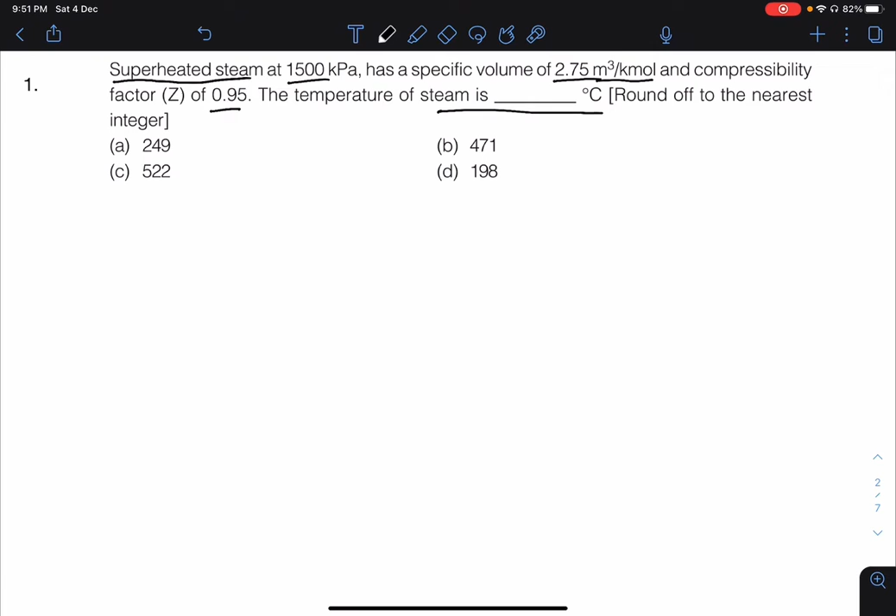Superheated steam at 1500 kilopascal has a specific volume of 2.75 meter cube per kilomole and compressibility factor Z of 0.95. The temperature of the steam is asked. So here I have underlined superheated steam and the value of Z is 0.95. If Z is equal to 1, we know it will behave as an ideal gas.

Since our Z is very close to 1, we can consider superheated steam as an ideal gas and use PV equals ZRT. Here we should know what R to use. Since it is given in kilomole, we will use the value of R as 8.314, that is in kilojoule per kilomole Kelvin. Since pressure is 1500 kilopascal

into 2.75 is equal to 0.95 into R which is 8.314 into T. So here we will get the temperature in Kelvin, but the temperature they are asking for is in degrees Celsius. So we have to subtract 273 from this equation.

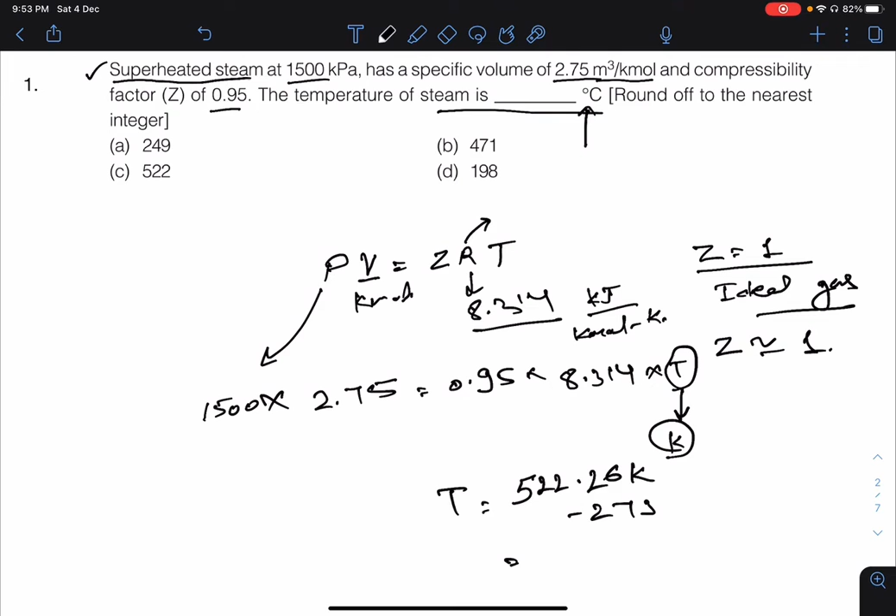So the temperature that will come out is 1500 into 2.75 divided by 0.95 divided by 8.314, that is 522.26 Kelvin. So we subtract 273 to convert it into degrees Celsius, that gives 249. So the correct answer is A.

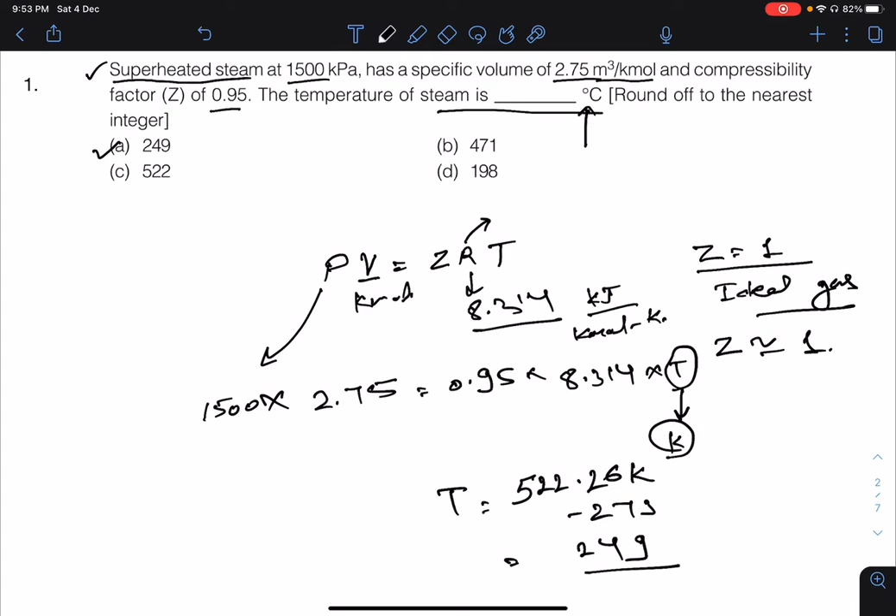We will move to the next question. In the vicinity of the triple point, the equation of the liquid vapor boundary in the PT phase diagram for ammonia is this one, where P is the pressure in Pascal and T is the temperature in Kelvin.

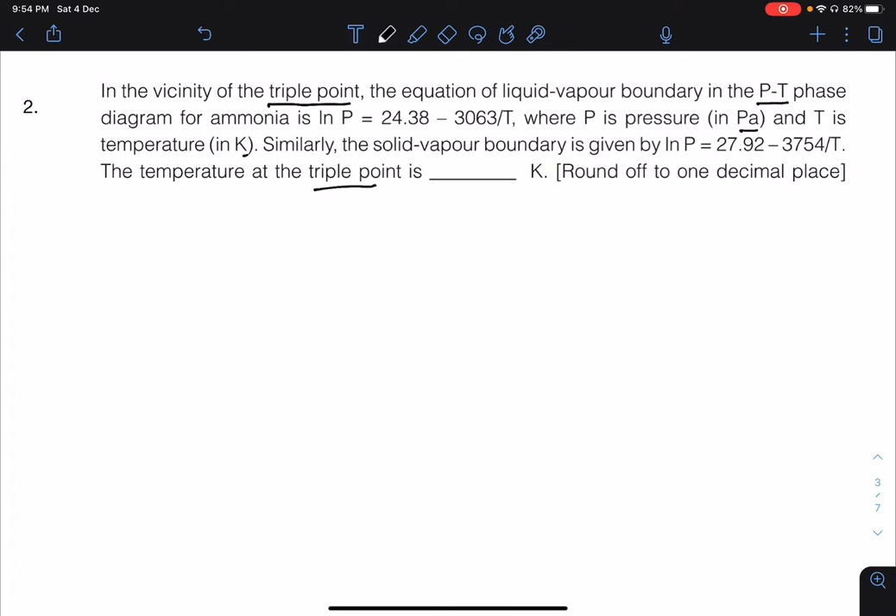Similarly, the solid boundary vapor boundary is given by this equation. The temperature at the triple point is asked. In GATE, you should read the units very carefully. This is in Pascal and this is in Kelvin, so we have been asked for Kelvin only.

So we know the diagram - this is our solid phase, this is our liquid phase, and this is our vapor phase. This point is called the triple point. What is the property of the triple point? That the solid, liquid and vapor phases all meet at this point. So at the temperature of the triple point, the pressure will be same.

So we can equate both equations, ln P from this equation and that equation. So we can write 24.38 minus 3063 divided by T is equal to 27.92 minus 3754 divided by T.

We will multiply the whole equation with T, and the result we get after solving this equation is T equals 195.197 Kelvin. Rounding off to one decimal place, we can write it as approximately 195 Kelvin.

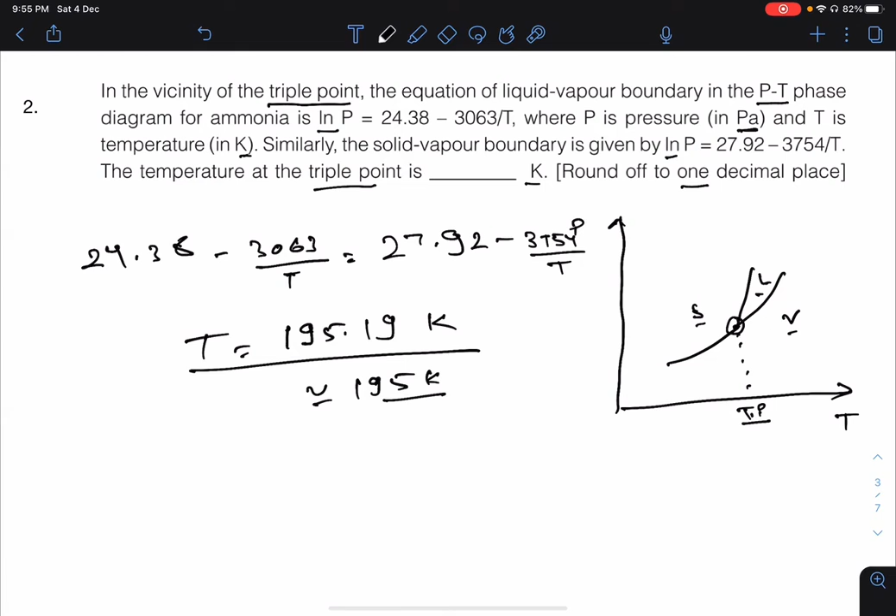This question is also very important, and if you have practiced previous year thermodynamics questions, then you can solve this question in 5 seconds only.

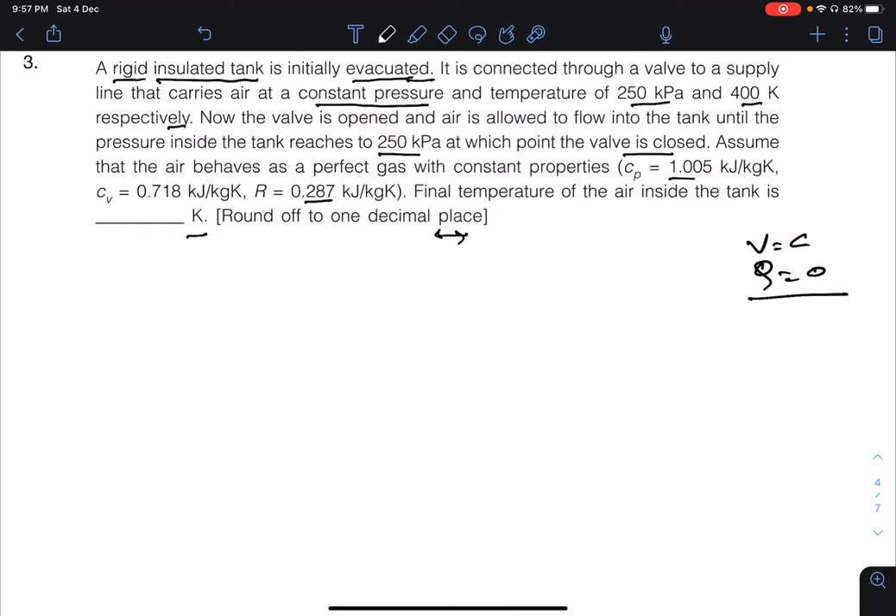So we have to solve this question. We will draw one tank, like this, which has a fixed volume and is connected to a valve with a supply line. In this, air is flowing at a pressure of 250 and temperature 400 kilopascal, 400 Kelvin. So there is only one inlet, there is no outlet at this point.

So this question is basically related to steady state, steady flow. Suppose at t equal to 0, this is the condition of the tank, and at time t equal to t, when the gas reaches a constant temperature, the final conditions in the tank are P equal to 250 kilopascal.

So here we have to write the steady flow energy equation.

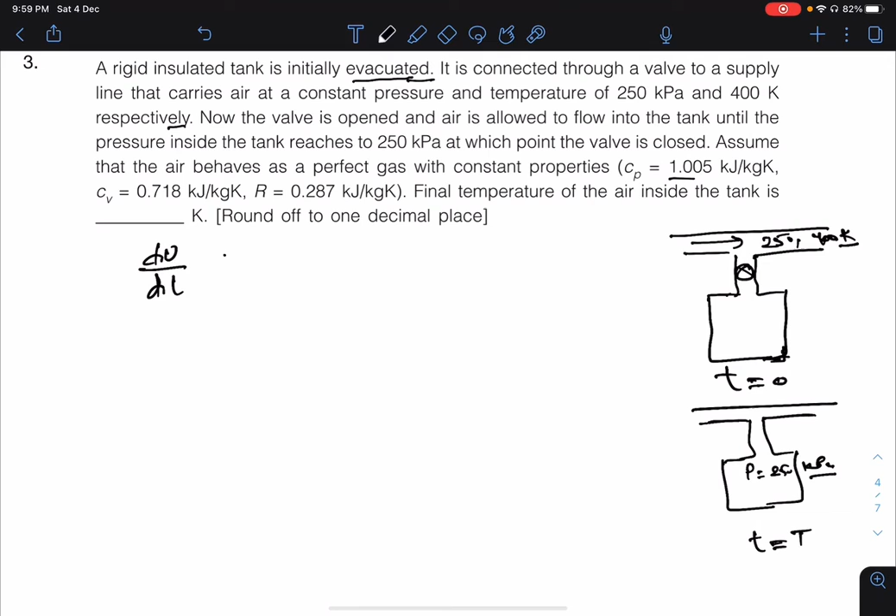So du by dt is equal to mi dot hi plus v1 square by 2 plus gz1 plus q minus me dot, that is mass flow rate at the exit, he plus v square by 2 plus gze minus w. Since the tank is rigid, w is equal to 0. Since the tank is insulated, so q is equal to 0, z is equal to 0, there is no elevation difference, and mass flowing at the exit is 0, there is no outlet. So the final equation that we will get, and there is no velocity.

So I can write du by dt is equal to mi dot hi. And by conservation of mass, we can write dm by dt. What will be the change in mass? mi dot minus me dot, that is rate of mass flow at the inlet and rate of mass flow at the exit. So dm by dt is the change in mass in the control volume. So suppose this is our control volume, so m2 minus m1 is equal to mi dot minus me dot.

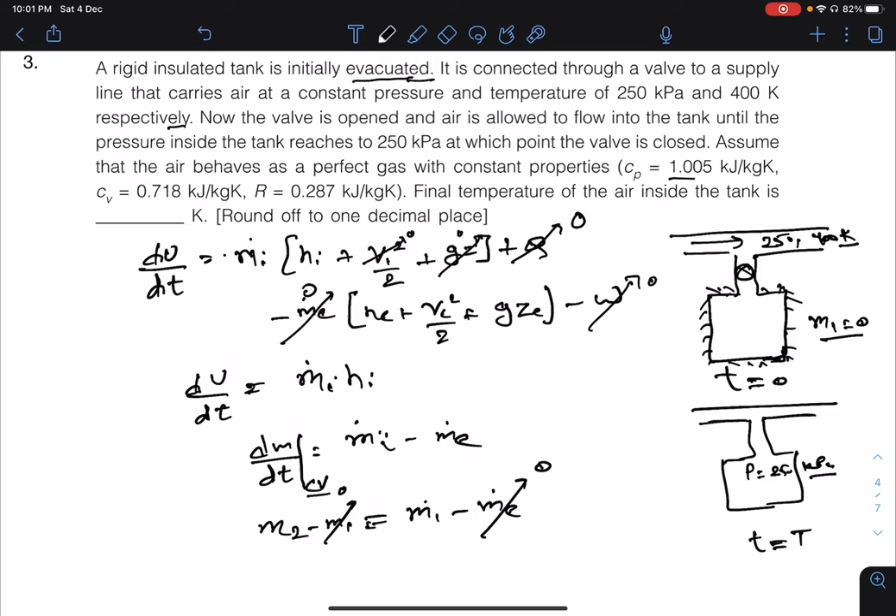So we know at t is equal to 0, it is evacuated. So m1 is equal to 0, there is no mass present, and there is no outlet. So m2 is equal to mi dot. So I can write du by dt is equal to, u2 minus u1 is equal to mi dot hi. So I can write m2 u2 minus m1 u1 is equal to mi dot hi. Since we know m1 is equal to 0 at initial stage, so m2 u2 is equal to mi dot hi. So m2 is equal to mi, so we can write u2 is equal to hi.

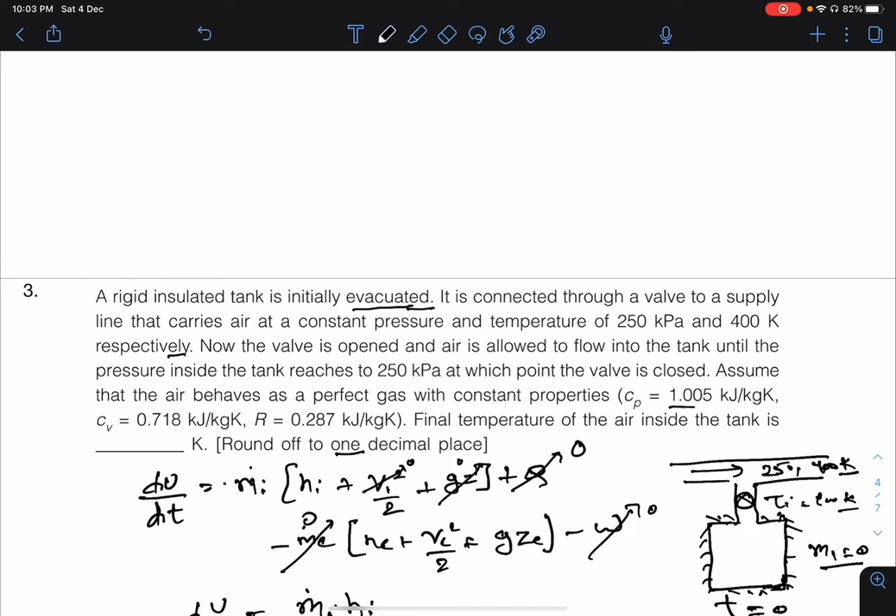I can write cvT2 is equal to cp into Ti. So the gas flowing at the inlet has a temperature of 400 Kelvin. So T2 is equal to Cp upon Cv into Ti. So I will put up this value, and the final temperature will be T2 is equal to gamma Ti. So 1.005 divided by 0.718 into 400. So the final temperature is 559.8 Kelvin. So rounding up to one decimal, we can write 559 or 560.

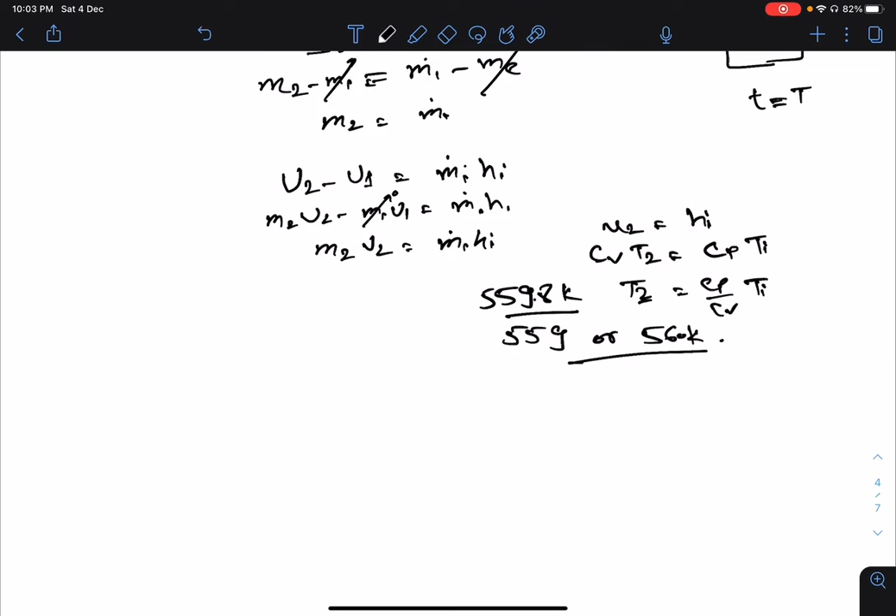Consider a steam power plant working on an ideal reheat Rankine cycle. So there is a reheat cycle and it is working on Rankine principle. The work input to the pump is 20 kilojoule per kg. The work output from the high pressure turbine is 750. The work output from the low pressure turbine is 1500 kilojoule per kg. The thermal efficiency of the cycle is 50%. The enthalpy of the saturated liquid and saturated vapor at the condenser pressure are given. The quality of the steam at the exit of the low pressure turbine is to be found.

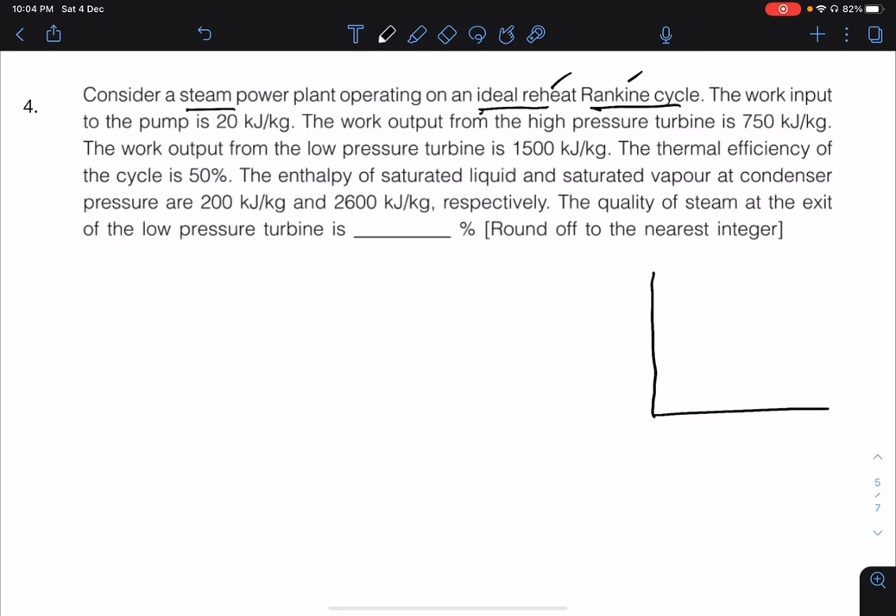So we will make its diagram. So we know for the steam it is a U-shaped dome curve. So this point is 1, this point is 2, this point is 3, 4, 5, 6, 7.

So work done in the pump is 1 to 2, that is H2 minus H1. That is given as 20 kilojoule per kg. Everything is in SI unit, that is per kg. The thermal efficiency of the cycle is 0.5, that is W net upon Q supplied. So Q supplied is from H3 to H4.

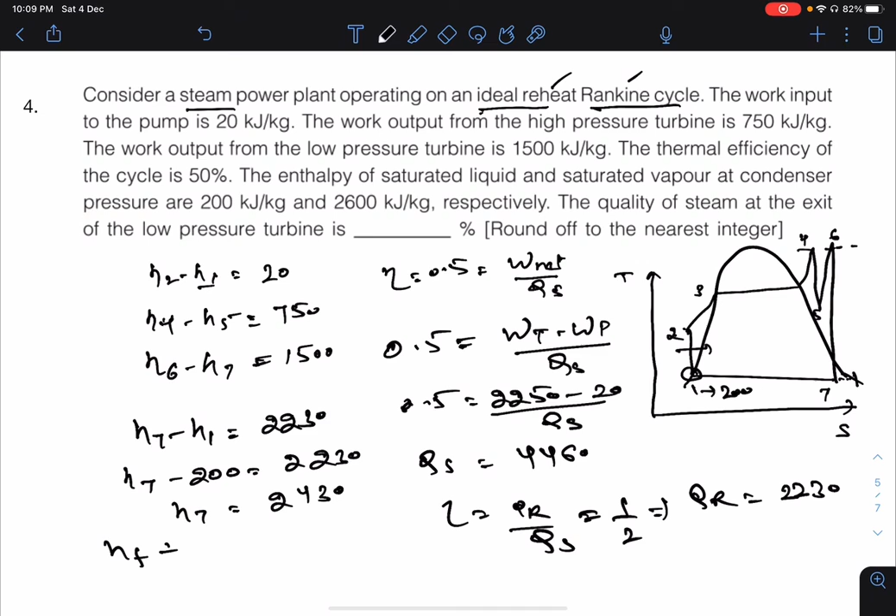So H7 I can also write as Hf plus X into Hg minus Hf, which is equal to 2430. Hf has been given as 200, plus X into 2600 minus 200 is equal to 2430. So X will come out as 93%.

So we will do reheat to improve the quality of the steam at the outlet of the turbine.

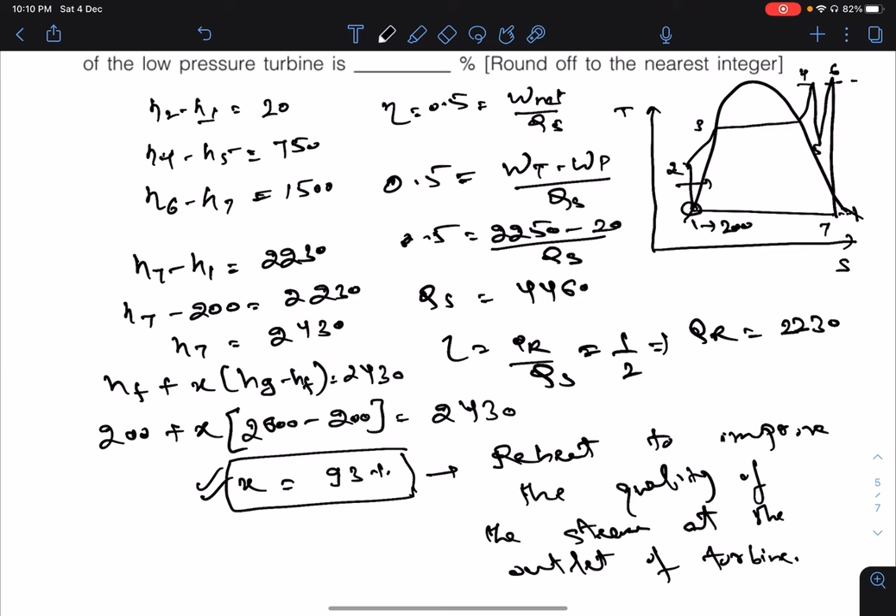So these things you should also notice, because this type of question is usually asked. This is our exit duct, and it is supplying a continuous flow of air. Now, to maintain the quality of the indoor air, the intake duct supplies a mixture of fresh air with a cold air stream. The two streams are mixed in an insulated mixing chamber located upstream of the intake duct, where cold air and fresh air are mixed.

We have been given the condition of the cold air, that is 5 degrees Celsius and 105 kilopascal during steady state operation. Fresh air enters the mixing chamber at 34 degrees Celsius and 105 kilopascal, so the pressure of the air remains constant. The mass flow rate of the fresh air is 1.6 times that of the cold air stream. Air leaves the room through the exit duct at 24 degrees Celsius. Assuming the air behaves as an ideal gas, we have to calculate the rate of heat gain by the air from the room in kilowatts.

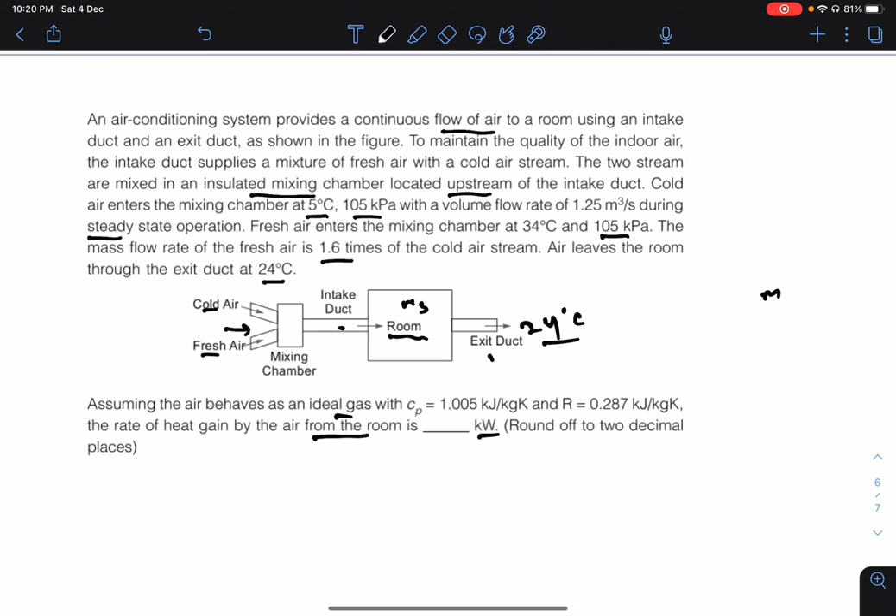This is a steady state operation, so we write mass as m1, m2, and m3. So P1V1 is equal to m1 R T1. If I write P1 as 105 into 1.25 is equal to m1 into 0.287 into 278, then m1 comes out as 1.645 kg per second. So m2 is 1.6 times m1.

That comes out as 2.632. Since it is a steady state operation, m3 is equal to m1 plus m2, which comes out as 4.27 kg per second.

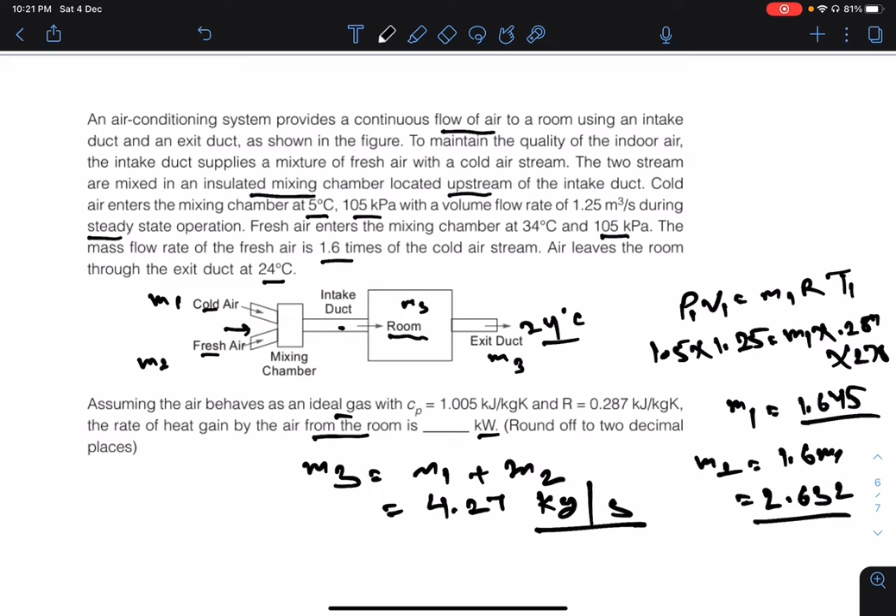Now we have to calculate the temperature of the room at this point, where the air is coming. So U1 plus U2 equals the total energy inside the room, which we take as UR. So we can write it as M1 C T1 plus M2 C T2 is equal to M3 C TR.

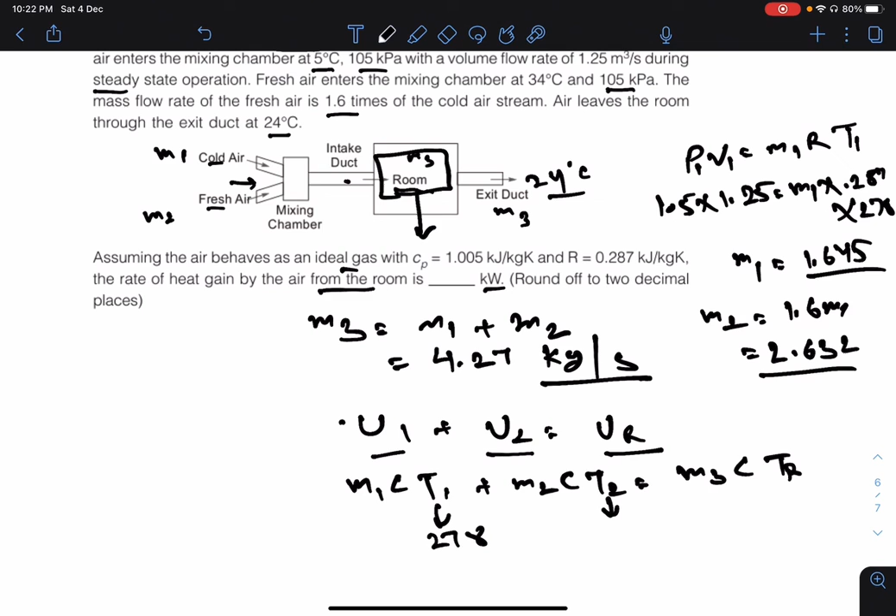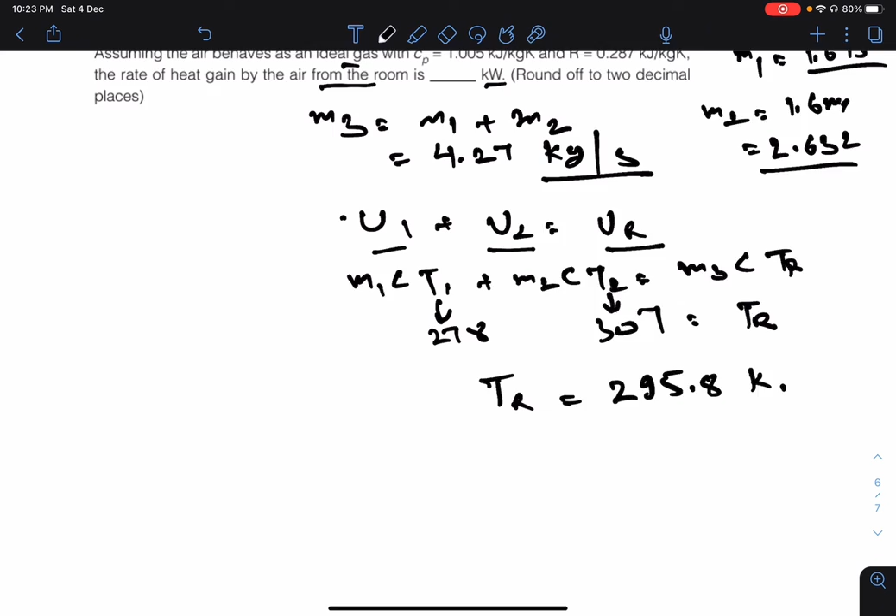Here temperature T1 is 278, and temperature T2 is 273 plus 34, that is 307. So we can find temperature TR at this point, which comes out as 295.8 Kelvin. The temperature of the air outside the room is 24 degrees Celsius.

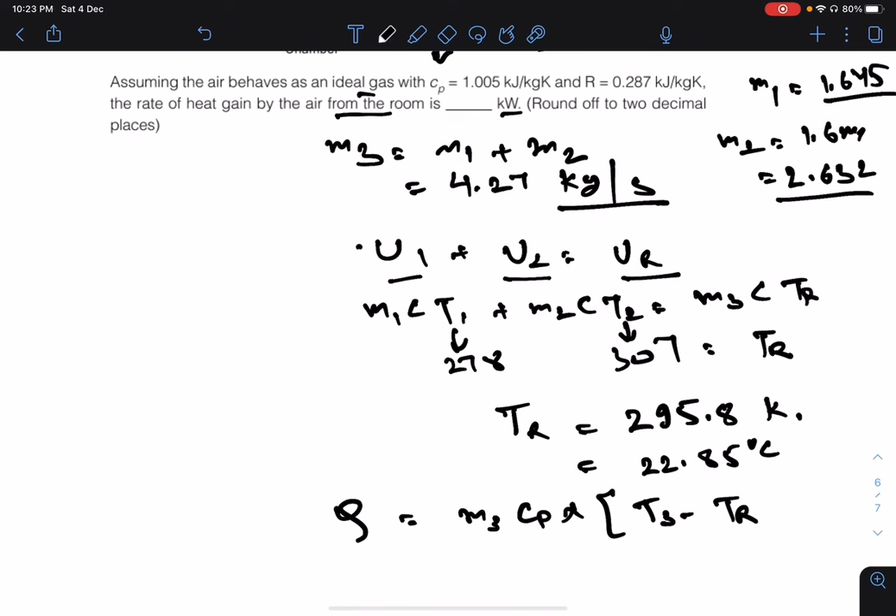Or we can write it as 22.85 degrees Celsius. So heat gained by the air is M3 Cp into T3 minus Tr. Why have we taken T3? Because we are assuming the process to be at constant pressure.

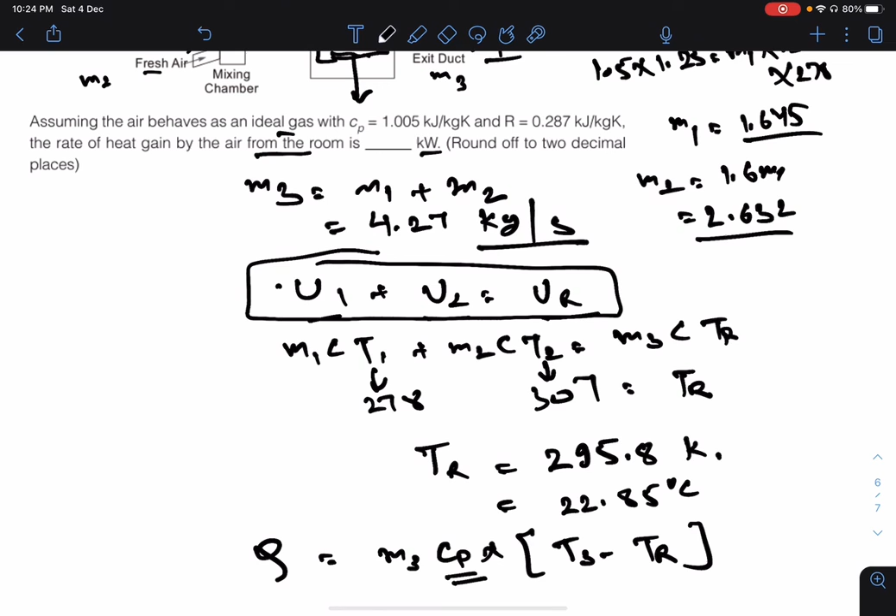Why can we use this formula U1 plus U2 equals UR? Because there is no heat loss at this point, since it has been given as an insulated mixing chamber. So the air is mixing and there is no heat loss, so total energy U1 plus U2 is equal to the total energy inside the room.

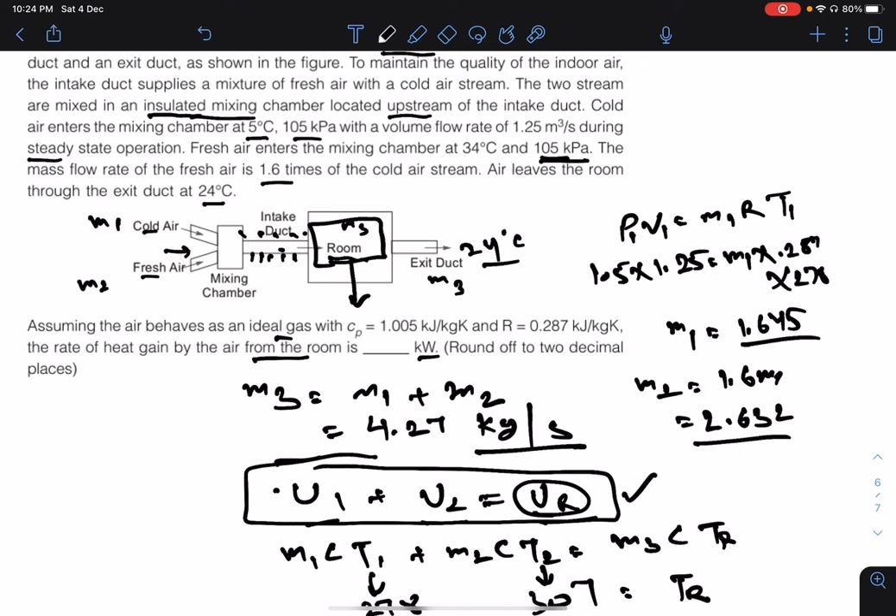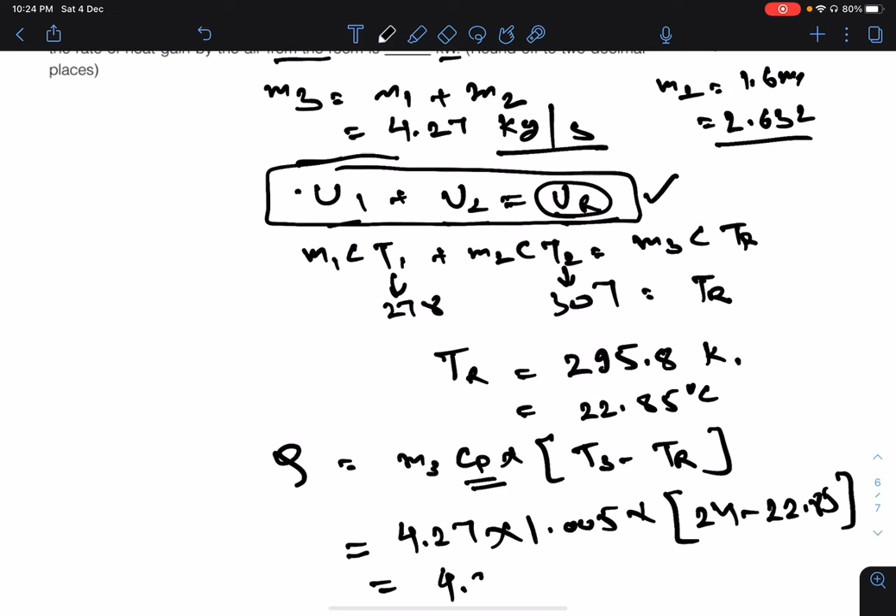So how much will Q be? 4.27 into 1.005, and this will be 24 minus 22.85. So it comes out as 4.96. It is in kilojoules actually, so the answer will be in kilowatts.